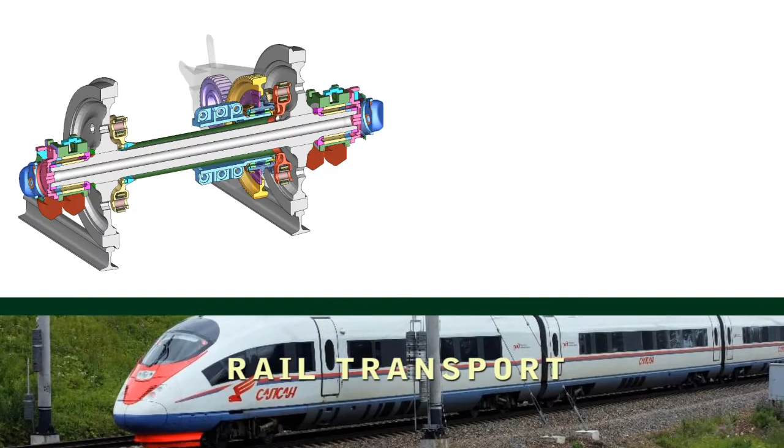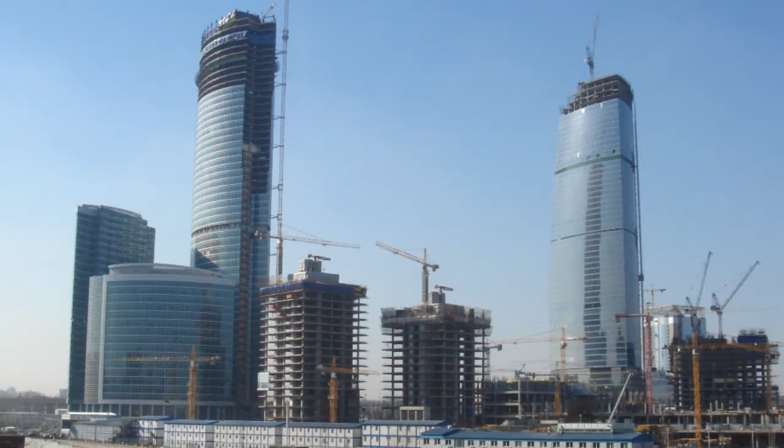Hexa company was established in 1997. Our experience in engineering computations has only grown since, while our confidence in correctness of the chosen approach has only strengthened. Today, engineering computations are a necessary support for any scientific and technical solutions, especially for unique and innovative ones.

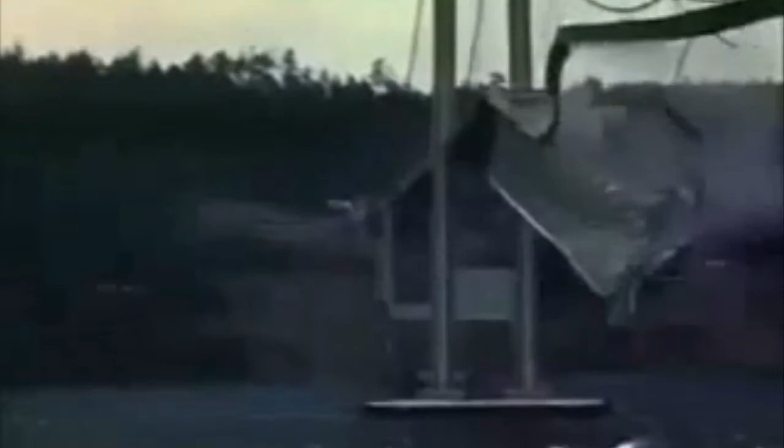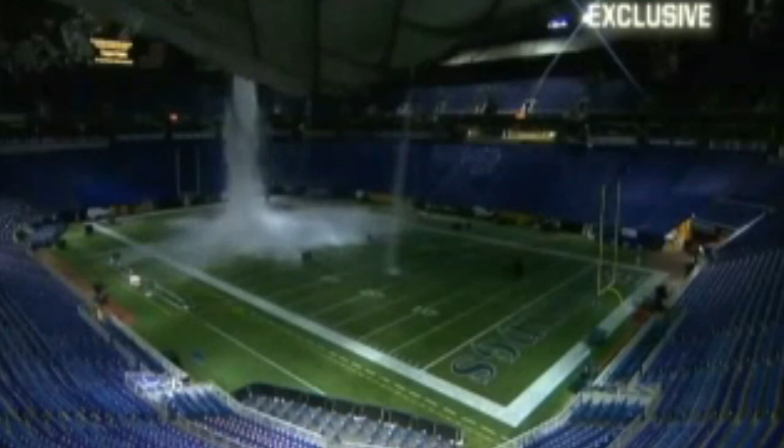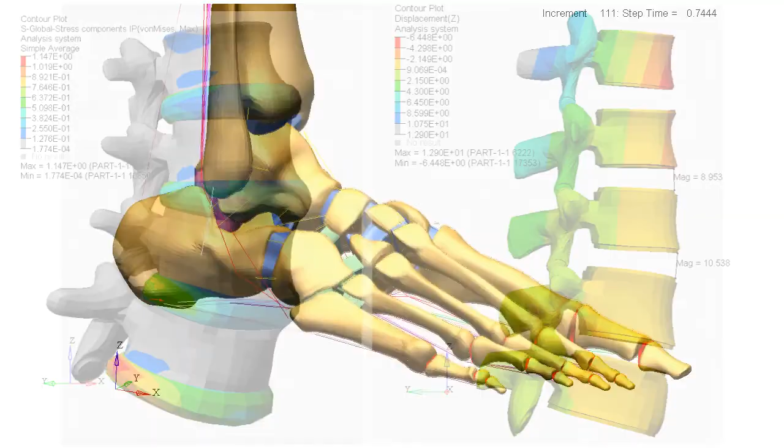Disregard of or saving on timely computations often resulted in deplorable consequences, rarely without human casualties, let alone economic losses. The Hexa company offers support in solution of engineering tasks of any degree of complexity. Today, we have broad experience in such production sectors as machine building, construction, biomedicine, and transportation. Competent specialists of the company use up-to-date techniques from the field of mathematical modeling of physical processes.

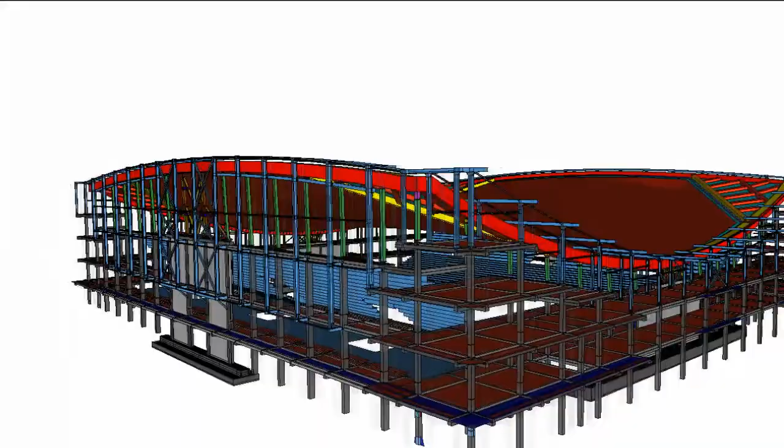In construction, the Hexa company commonly offers two main types of work. The comprehensive engineering analysis of structures may include, depending on the preferences of the customer and recommendations of the company's specialists, the following types of work: checking calculations, computation support, design, computations of structural components, load and impact computation.

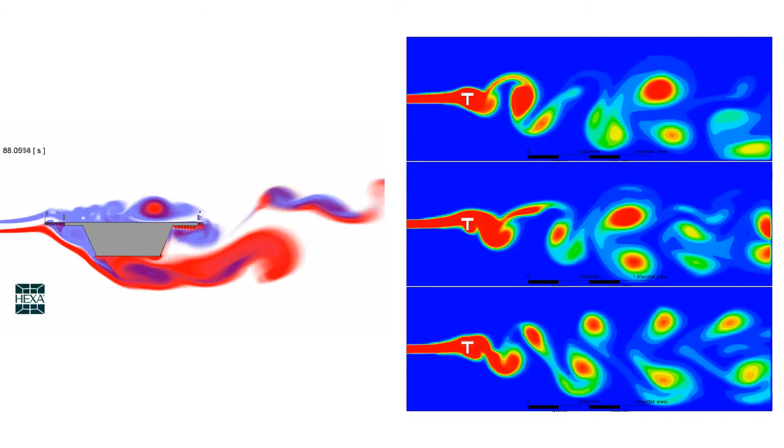Due to a specific character of its work within the framework of existing normative documents base and limitation in the facilities used, an ordinary designer has no opportunity to take account of all design features of a unique structure. However, the specialists of the company employ their knowledge in the fields where such skills are not commonly required, but a need to use them is shown not only by accidents but also by customers.

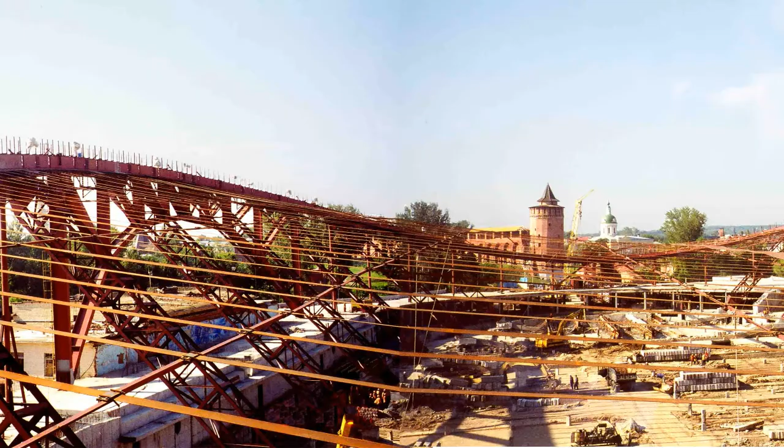The load-carrying ability analysis of the ice arena in Kolomna showed a need to make significant structural changes. A computational model of bearing structures included a detailed three-dimensional description of behavior of all structural components. It is hard to overestimate an economic effect of timely changes made on the basis of our computations. The facility, valued at $200 million, was saved from destruction.

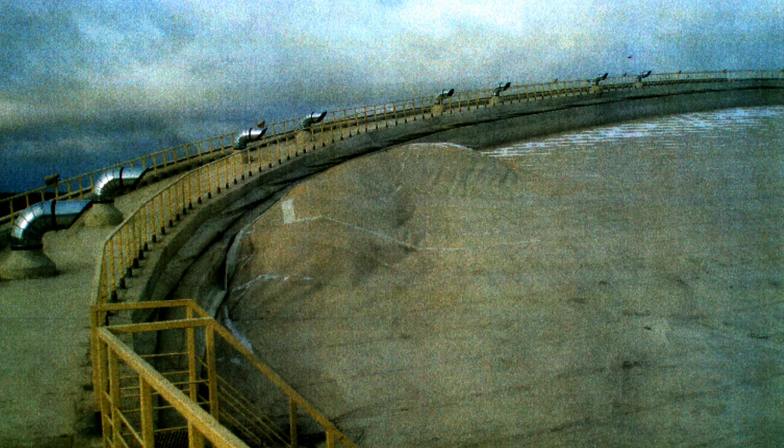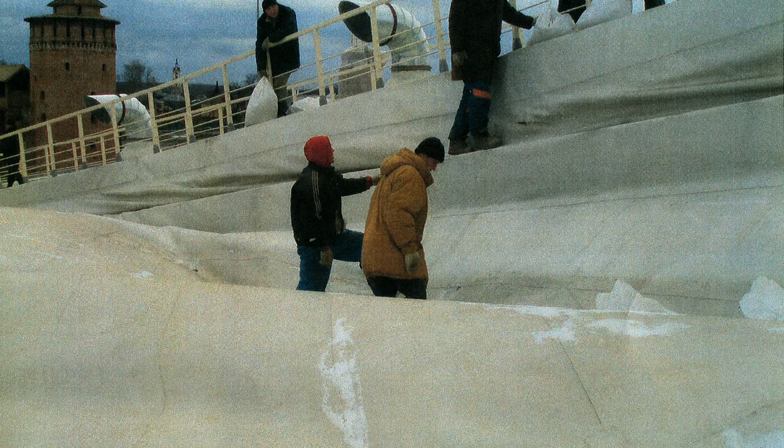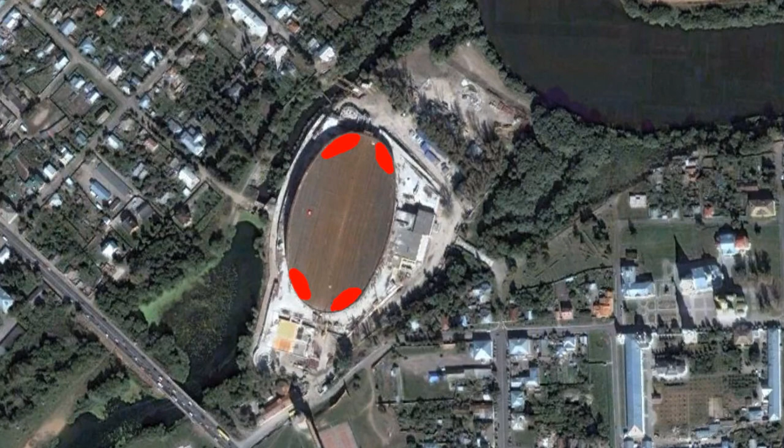The appearance of local bulges in the upper layers of roof covering of the ice arena during further service showed that the analysis based on normative documents and often employed by designers was reduced. Employing the techniques of a traditional approach to computations with the use of simplified mathematical models, they could not take into account features later found by the specialists of the Hexa company by means of additional aerodynamic evaluation of wind impact. Finally, it became necessary to replace the roof covering, which could have been prevented by spending significantly smaller amounts of money on computational overhead.

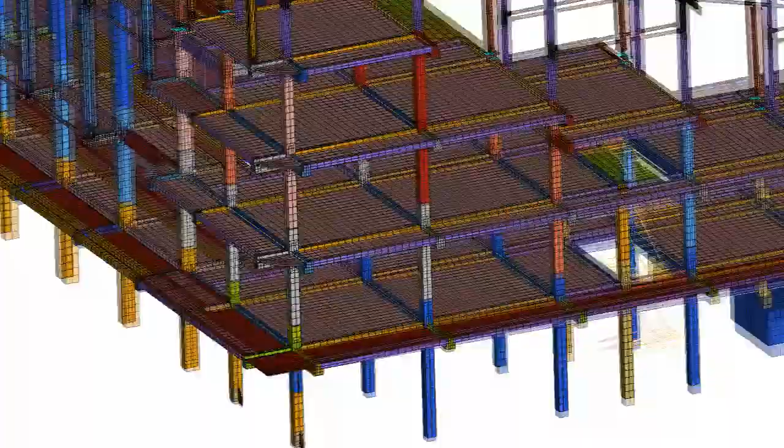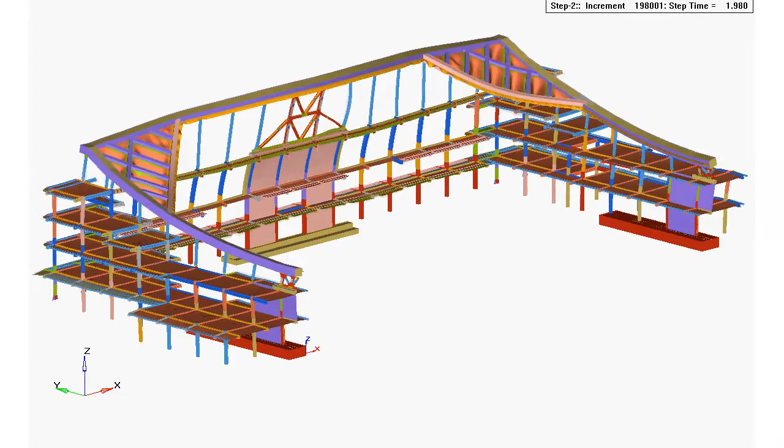The use of computation techniques, which make it possible to consider almost any nonlinear features in behavior of reinforced concrete, is the need of today. The company successfully, with recognition in state expert examinations, realized its approaches in modeling of reinforced concrete structures by example of such works as checking calculation for constructions of the ice arena in Angarsk. The facility is located in the earthquake-prone region. Design of lining 5.8 meters in diameter for the underground railway tunnel in Nizhny Novgorod.

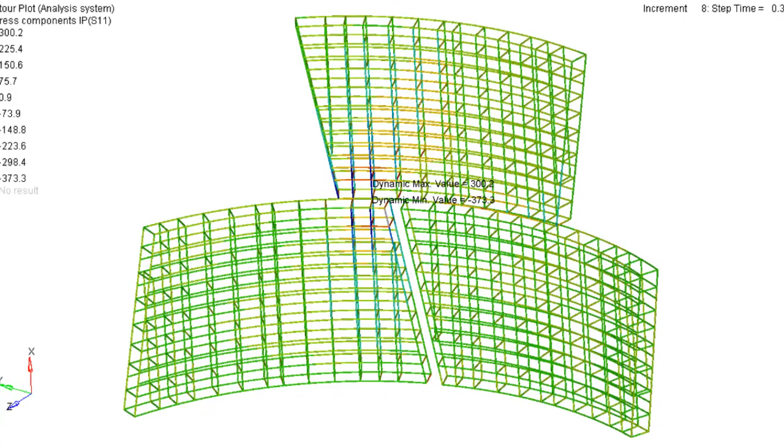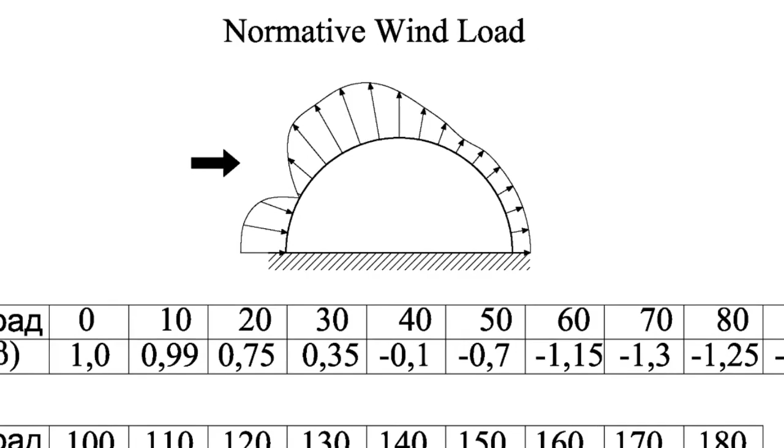Computational models of the mentioned facilities considered a spatial arrangement of reinforcing steel in reinforced concrete structural elements and physical nonlinearities during the operation of reinforced concrete elements. Load and impact computation is one of the main stages determining the correctness of the construction projects in its entirety in the future. In the process of development of unique construction projects, designers often deal with loads and impacts for which there is no substantial description of computation techniques in the standard specifications or in scientific and technical literature.

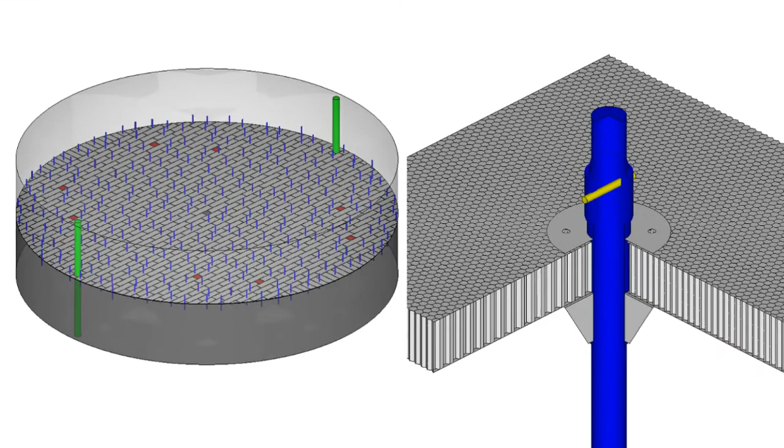Thus, in the analysis of bearing structure strength for a pontoon of oil tank 20,000 cubic meters in volume, it became necessary to assess the impact of air bubble coming to the surface from the bottom of the tank when a filling tube was purged. The company's specialists computed the loads produced by such impacts with the use of a fluid mechanics apparatus. The obtained results provided a detailed insight into estimated loads on the pontoon structure.

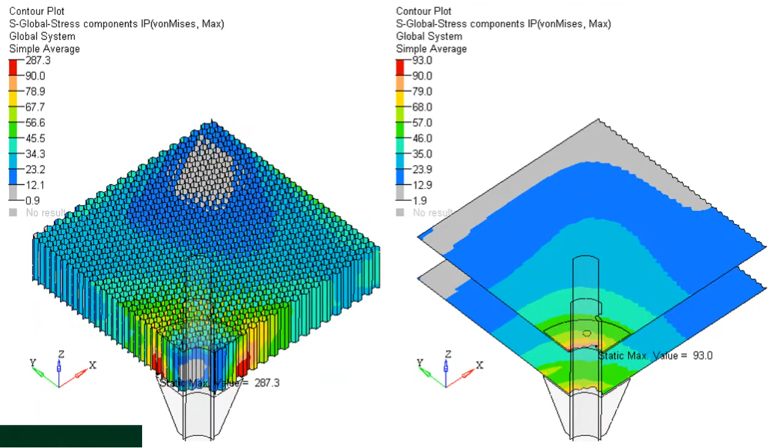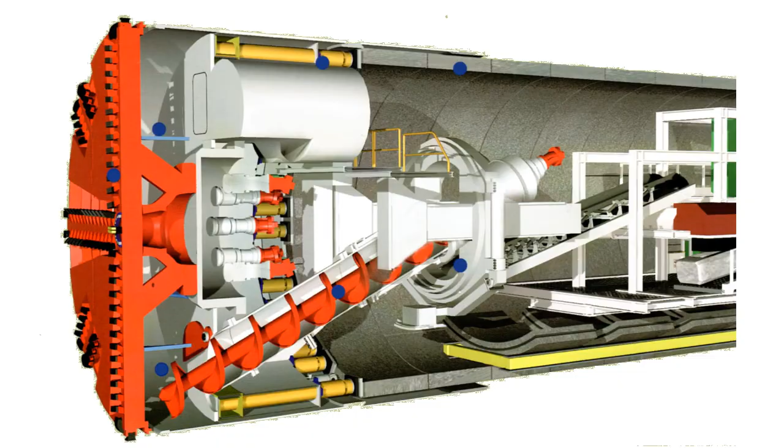In the design of tunnel lining, the company's specialists employ ground load computation techniques with the use of both two-dimensional and spatial three-dimensional models. Both layer structure of ground and pressure of underground waters are taken into consideration. The company is experienced in determining loads on the tunnel shield in the process of underground tunnel drilling, including an inclined one.

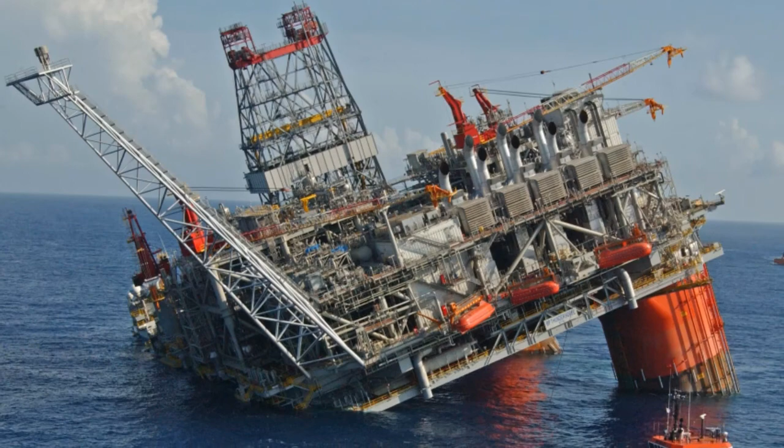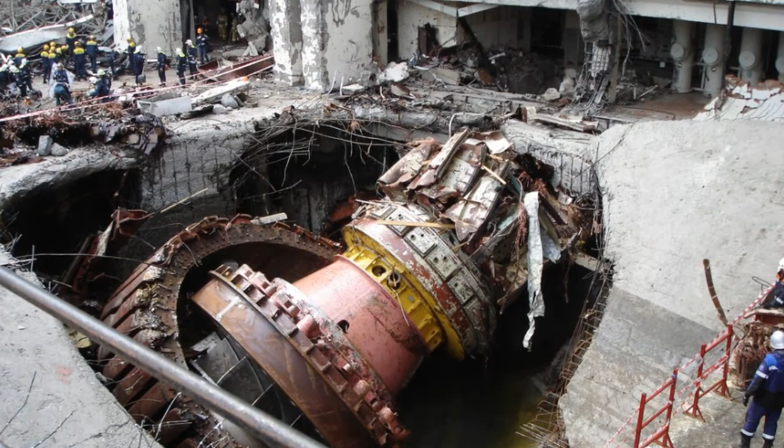In addition to the comprehensive engineering analysis of structures, the company is experienced in works related to assessment of accidents and man-made disasters. Such works can be divided into two types: inspection of structures for conformance to normative documents and analysis of contingencies and structures' operational conditions.

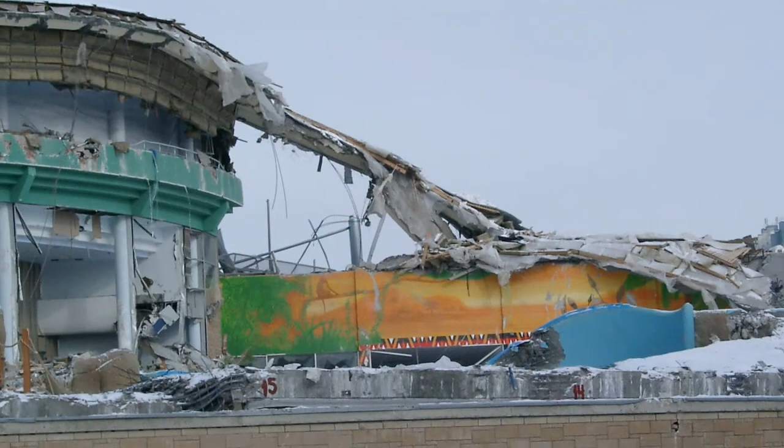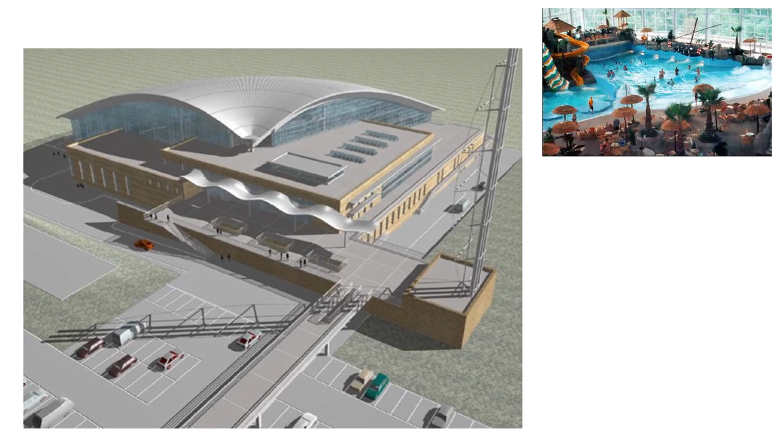The analysis of load-carrying ability of the collapsed roof of Transvaal Water Park, when 28 people died and more than 100 people were injured, which was carried out by the company for the purpose of assessing the conformance of the structure to the normative documents with a view to its strength, showed a complete inadequacy or non-conformance of the project. However, the project had passed all stages of expert examination at its time and had functioned for some time before the accident.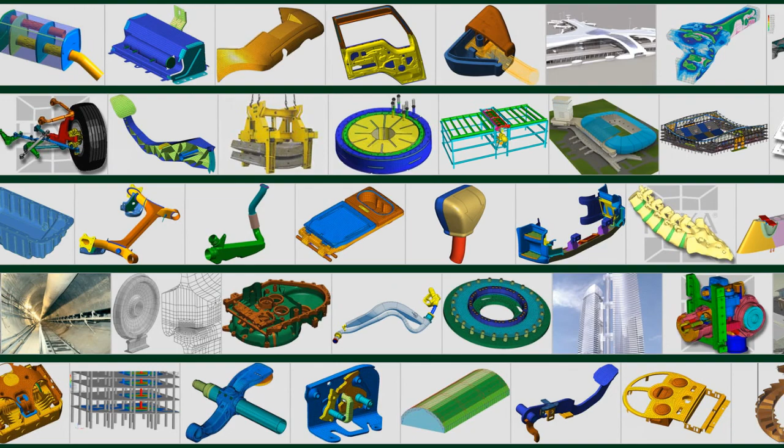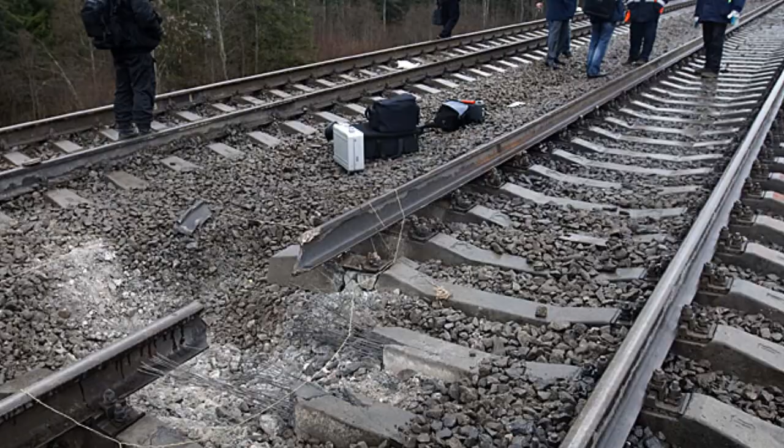The company's wide experience in many fields where engineering computation with the possibility to build detailed mathematical models is needed gives it an opportunity to participate in the assessment of accident and man-made disasters almost in any field of science and engineering. Thus, using its knowledge and experience, Hexa specialists analyzed the causes of derailment of the Nevsky Express traveling from Moscow to St. Petersburg on November 27, 2009.

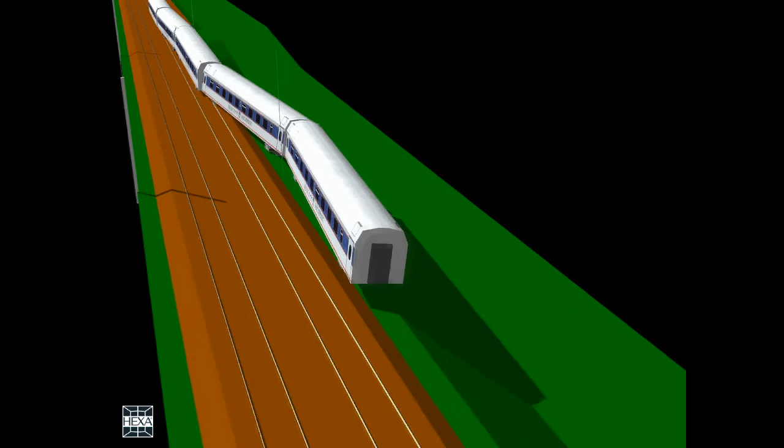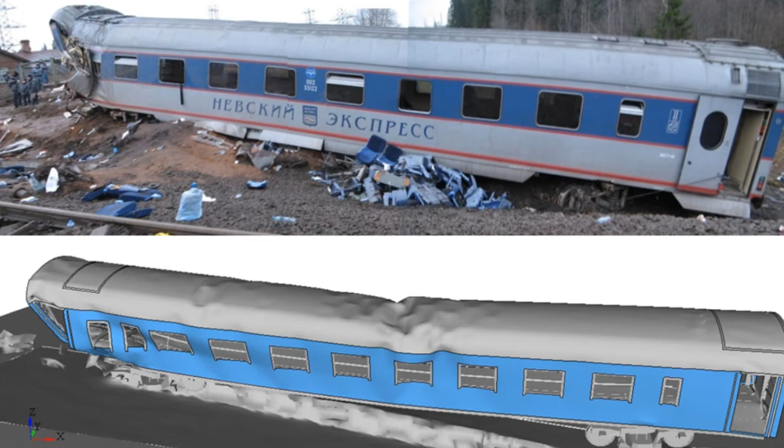There were built detailed models of the train's movement in the area, a detailed model of elements of the upper railway structure, and a railway infrastructure. Passengers in the models were represented by virtual anthropomorphic dummies with respective physical parameters. The results of such detailed modeling make it possible to draw definite conclusions concerning the causes of a large number of human casualties, dozens, in this accident. The so-called cascade seat tear-off in one of the rail cars, which crashed to the ground at its full speed, resulted in such large number of victims.

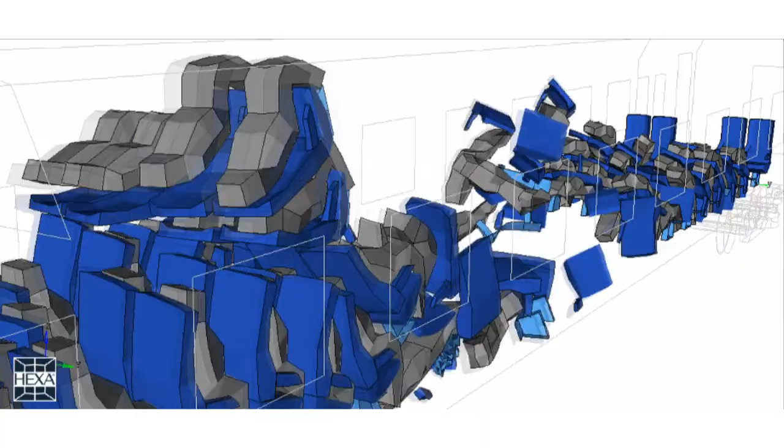In addition, the company's specialists showed, using the obtained mathematical models, that it was possible to adjust the structure in accordance with the necessary requirements for its safety. In particular, there was developed a simple structural solution which increased the strength of passenger seats more than 3 times. With the use of such structural solution, the number of victims could have been smaller.

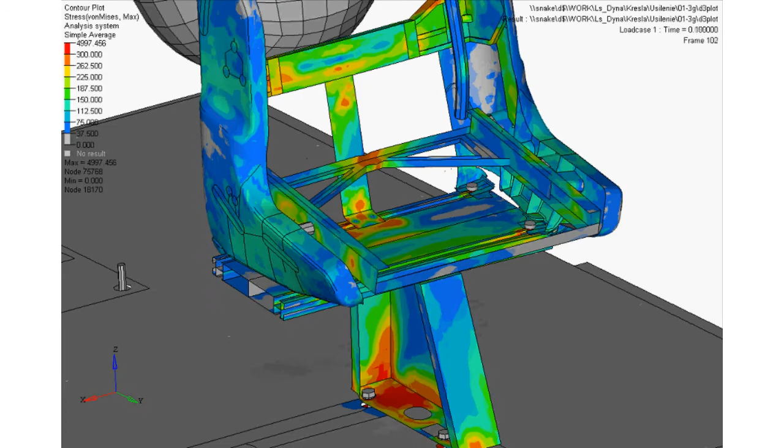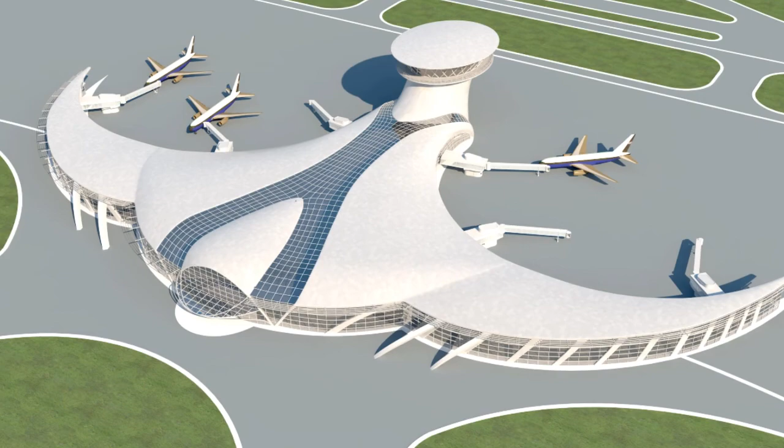Anticipation and analysis of contingencies at the stage of design and development make it possible to avoid costs of rectification of the consequences of accidents. Our company transforms the experience of today's tragedies into more safe structures of tomorrow.